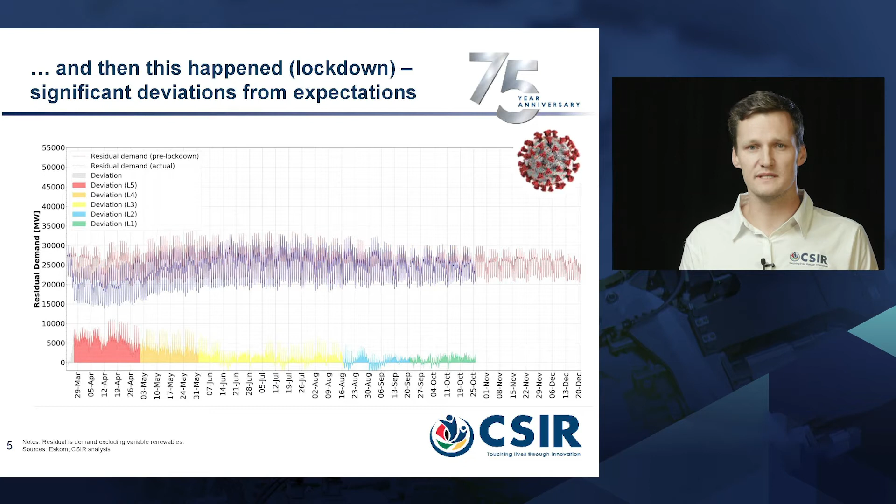As you can see, these significant deviations resulted in some system operations challenges, but it did indeed assist. That lower demand provides additional space for the supply side and for maintenance to be done. And we'll try and talk through that as well in terms of the maintenance that was done during the weeks of 2020 when we were in level 5 and level 4 of the lockdown.

If we just zoom in then specifically on that deviation, up to 11 gigawatts under level 5 at least, and up to 8.5 gigawatts under level 4 was what we started to see in terms of the deviation in the maximum demand. Now remember, the South African power system is about a 32 to 34 gigawatt peaking system, so there is a significant impact on the peak demand during those first 5 weeks, and then during the next weeks under level 4, there's still a significant deviation of up to 8.5 gigawatts or 8,500 megawatts.

Unfortunately for the power system, but fortunately for the economy, the demand did return, businesses reopened, the mines reopened, refineries reopened, and you start to see that in the yellow, the blue, and the green, so under level 3, level 2, and level 1 of the lockdown, that the demand really returned back towards, you could call, a new normal, but the deviations are then much smaller during those periods and within error tolerances that you could expect.

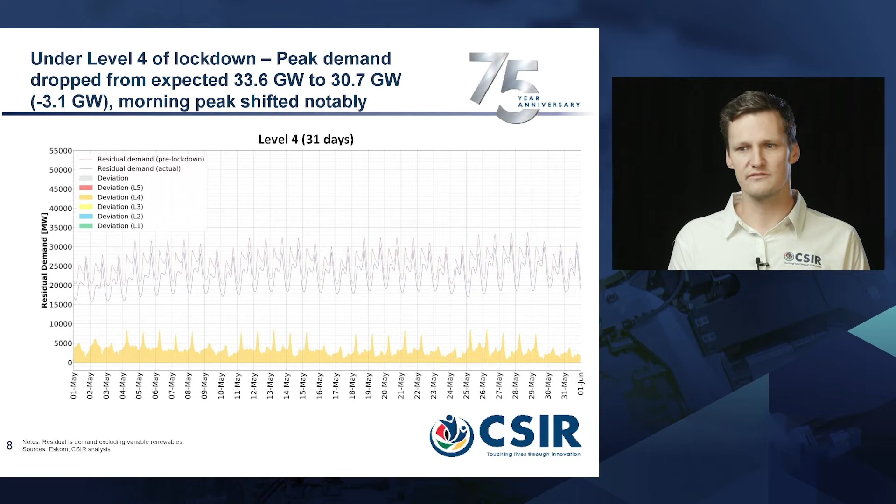Under level 4, a bit more of a pattern started to emerge, where when you look at the deviation at the bottom of this graphic, you see that during the weeks, there's really a large deviation in the mornings. It seems like that was really as a result of people getting up a lot later, not necessarily going into the office, and remote working as a result. So you see those spikes during the weeks, but then on the weekends that starts to move away, and you really just have that sort of base demand difference under level 4.

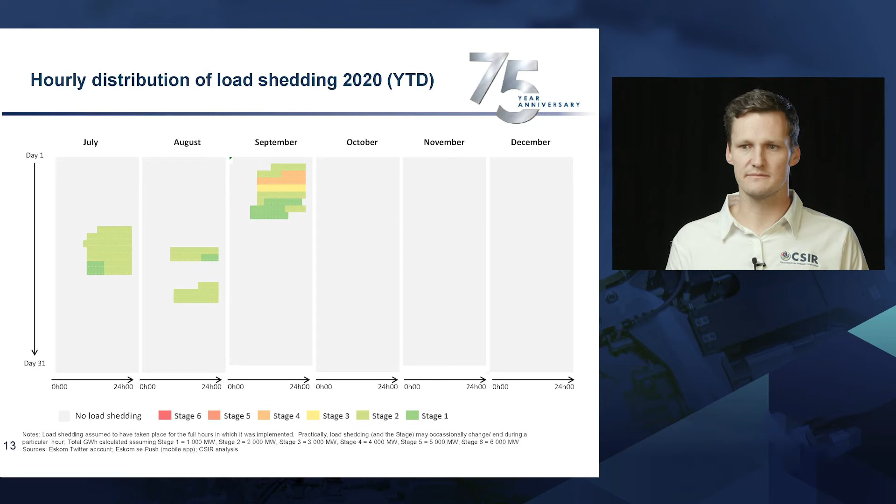So a quick summary, 2020 indeed was the most intensive load shedding year that we have seen thus far, based on the data that we do have in the public domain. 90% of 2019 levels actually occurred within the first 12 weeks. Thereafter, as I was talking now, we did push past 2019 levels in July already, and we're now at 1,734 gigawatt hours versus the 1,352 in 2019.

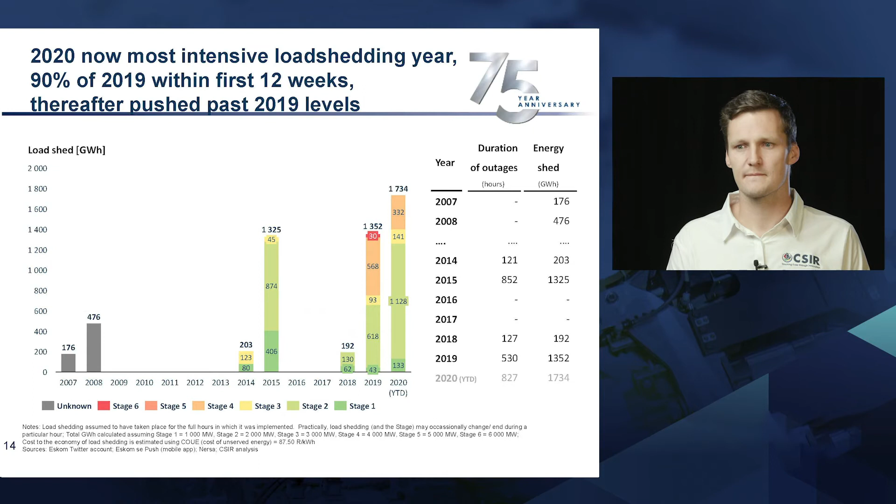So this is a weekly plot of the residual demand for the year. The dark blue is what we have seen on a weekly basis in the order of 3,000 to 4,500 gigawatt hours per week of demand across the country. The gray area, though, is the deviation. So you can see as the lockdown started in week 12, week 13 of the year, you really see significant deviations in the expected weekly energy demand in the order of a reduction of 20% for an extended period of 2 to 3 weeks.

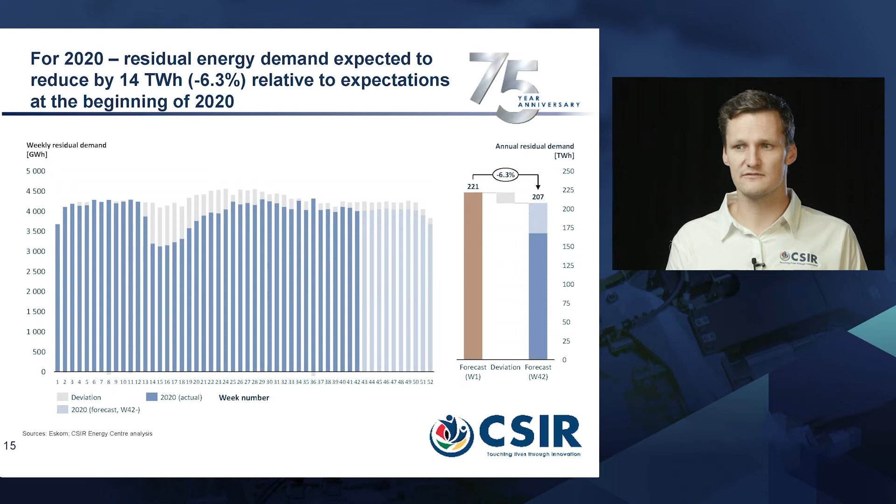That did recover, though, as you see, as we went into winter. A lot of cold days, a lot of high demand, and also, of course, industry returning. And you see that then those deviations get smaller and smaller through the year, all the way up to week 42, of which the data is now available. And you see that the deviations are now quite small, still a bit lower than expectations from the beginning of the year, but really very close to what the forecast was. A 14 terawatt hour, or about 6.3% reduction in energy demand is expected for 2020. That is residual energy demand.

So in terms of what we did at CSIR, system adequacy has been highlighted by many institutions. We're just showing two here, two seminal pieces of work that are periodically published. One is the Integrated Resource Plan 2019, the other of which is the Medium-Term System Adequacy Outlook, also published in 2019. That's also published annually.

But in both of these documents, there was a highlighting of the short-term supply gap between 2019 and 2022 in the IRP, and then also a highlighting of the gap if the Eskom fleet EAF fell below 72%. If you keep that number in mind, you'll start to see why that becomes important, because the EAF is indeed below that level, and hence we have been experiencing load shedding and will be expected to see load shedding in the coming years, unfortunately.

So this is the trend, long-term trend, all the way back to 2000 up to 2019 in terms of actuals, and then some forecasts towards 2030. As you'll see, the decline in the EAF of the Eskom fleet down to below 70%. The year to date is just about 67%. Those are the actuals year to date.

In terms of some forecasts, previous versions of the IRP in the IRP 2018 is the red curve, black curve, and green curve there with the dashed curve. You'll see that the recovery at that stage was expected to head towards 80% in terms of a mid scenario, but still above 70% even in a low scenario.

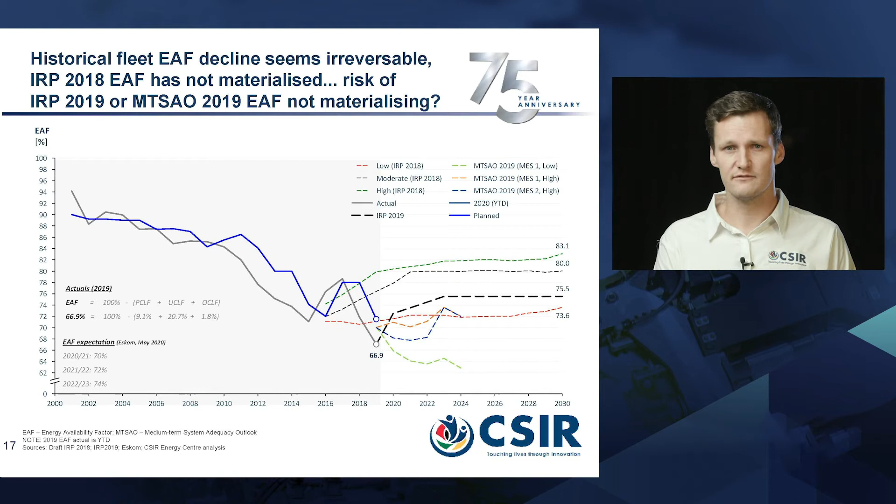And you'll see the medium-term system adequacy outlook, which perhaps has more updated information within it, starts to show something that is closer to the reality, which is the green curve, the blue curve, and that orange curve in terms of a range of the EAF. The green curve is really a low EAF expectation for the medium-term system adequacy outlook, whereas the orange curve is then a high expectation for different levels of minimum emission standards compliance.

So this is now also EAF for the year to date, 66% that I was talking to. In 2019, it was 66.9%. The year before that, just below 72. So you'll see the trend indeed is on a declining trend. It's very worrying. Eskom are trying to improve this, but the reality on the ground is something different.

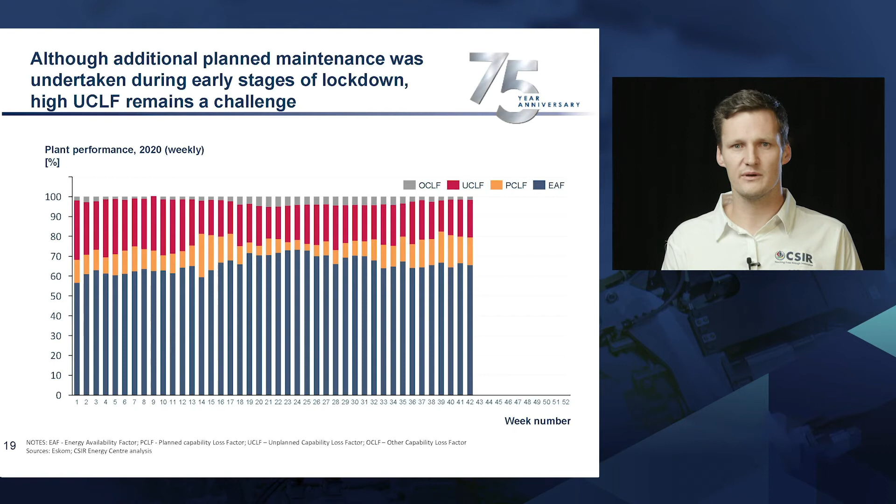The alternative scenario that we looked at, we named the updated scenario, and we developed this around December 2019, so this was before the pandemic. Here we looked at a lower demand forecast, but also a lower EAF, so an EAF that is declining over time.

So coming to the expected shortages. So here we are looking at the IRP scenario. So if you can remember, a relatively high demand forecast, but also a relatively good EAF. So here we can expect capacity shortages over the next few years. The capacity shortages are shown on the left. This refers to the magnitude of an outage in a given hour. And the graph on the right, in terms of energy shortage, refers to the duration and severity of the outage.

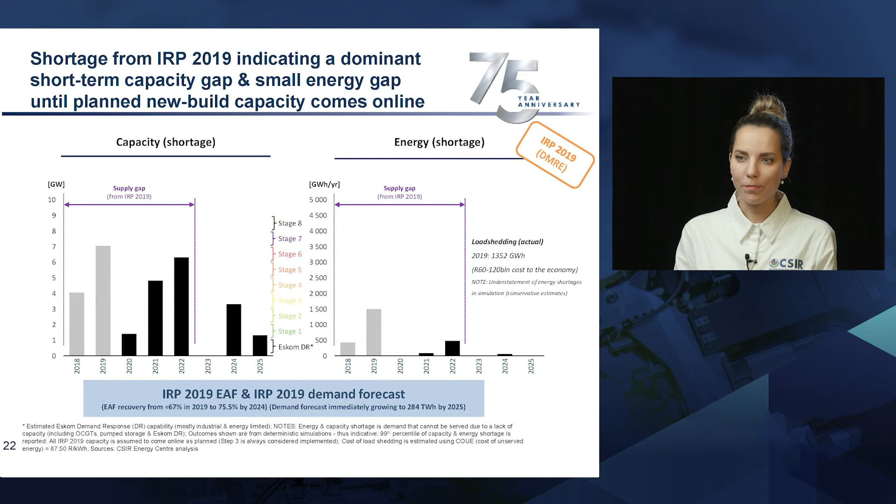If we have a look at what those shortages look like on an hourly basis, this graph shows on the top curves the demand profile of the country, so the national energy demand in summer and winter. The profile is lower in the evening and increases in the morning peak, pretty much flat in the middle of the day, and increases again in the evening.

The graphs at the bottom are showing the profile of the outages that we expect in this IRP scenario. And as you can see in some of the earlier years, the outages are expected to take place all day, so it's sort of a 24/7 profile. And this is indicative of an energy shortage. Over time, this is expected to change to more of a capacity issue, where the outages are in the morning and the evenings.

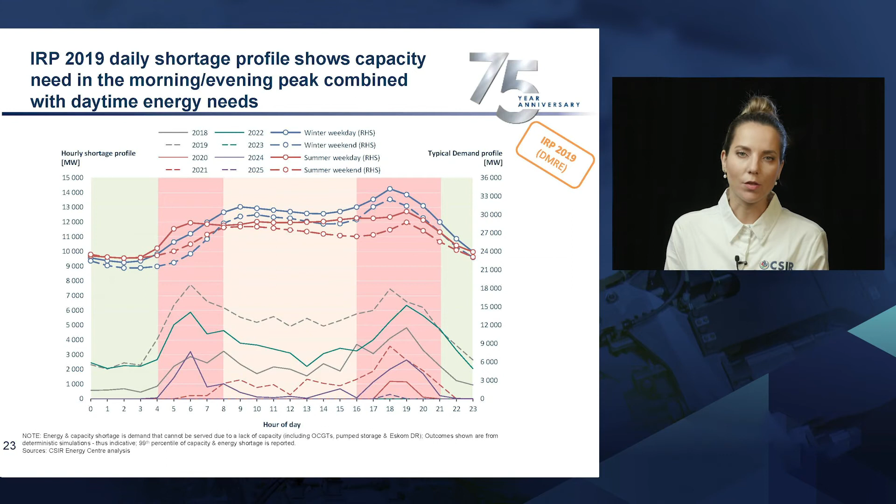So what does this look like in a little bit more detail of the power system supply stack? Here we're showing two simulated weeks for this IRP scenario. We obviously modeled every single hour of all the years, but that's a bit difficult to show. So here we are showing two drastically different EAF weeks. The EAF that we report annually actually does change on a daily basis and a weekly basis, and the average over the year is what we typically report on.

But in a week where we have a poor EAF, 64% in week 1, you can see here we have some unserved energy, so that's the white area, just under the black line, and the diesel generators, which are shown in the cream color, are working really hard to try and meet load. In the second week, this is a much less constrained week where the EAF is performing quite well.

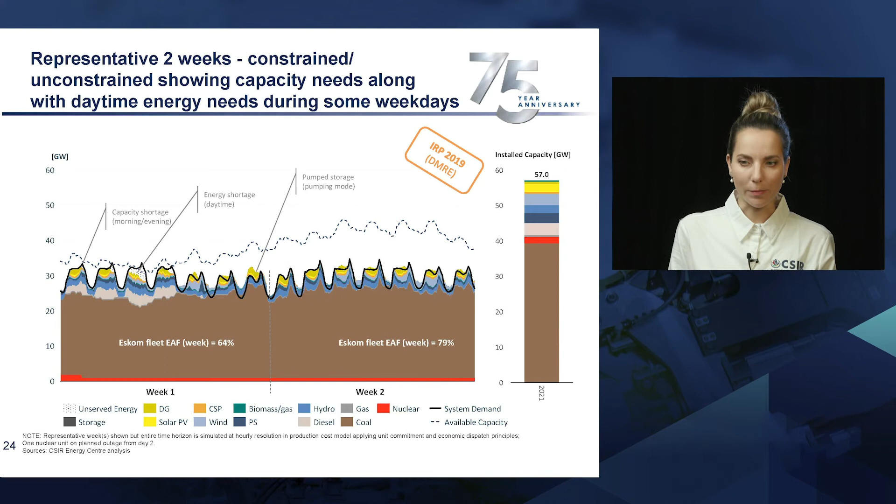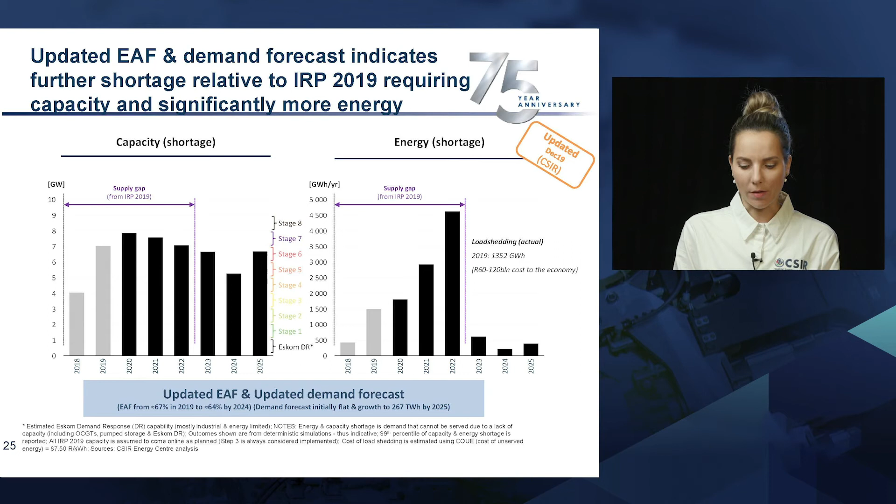Now if we go to the alternative scenario, a little bit lower demand forecast, but a much worse EAF. So here you can see the capacity and the energy shortages are much more profound than the previous scenario. The energy shortages are expected to be worse in 2020 than 2019, and this is expected to grow to 2022, and after that, new capacity comes online according to the IRP. So this is obviously a much worse situation and a worse outlook for the country.

Now, how do those outages look on an hourly basis? Here, the graphs are in the same format as before, but now we can see that the outages are more of an energy shortage occurring all throughout the day in most of the years.

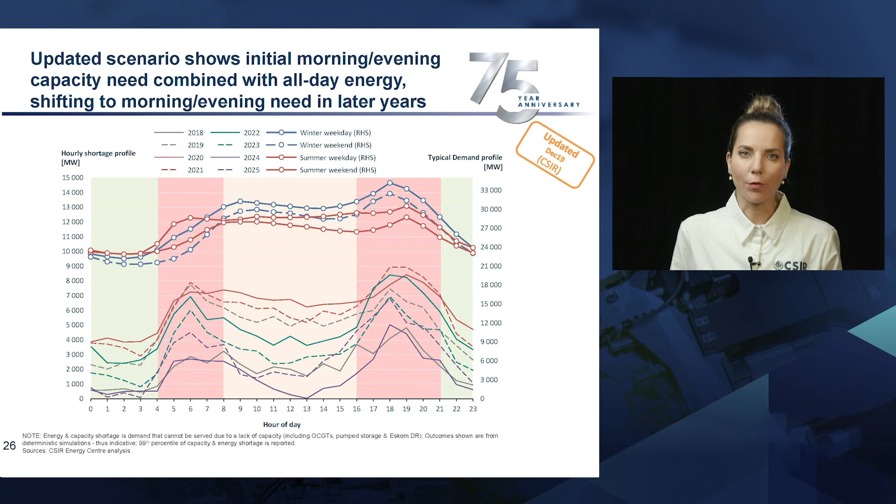Again, we simulate the same 2 weeks. Now we have a much lower EAF. So here we can see a lot more load shedding occurring, so a lot more white shaded areas in this graph, and the diesel generators are working harder in both weeks. The energy shortages are also throughout the day, so you can see the white shaded areas are occurring morning, evening, and middle of the day.

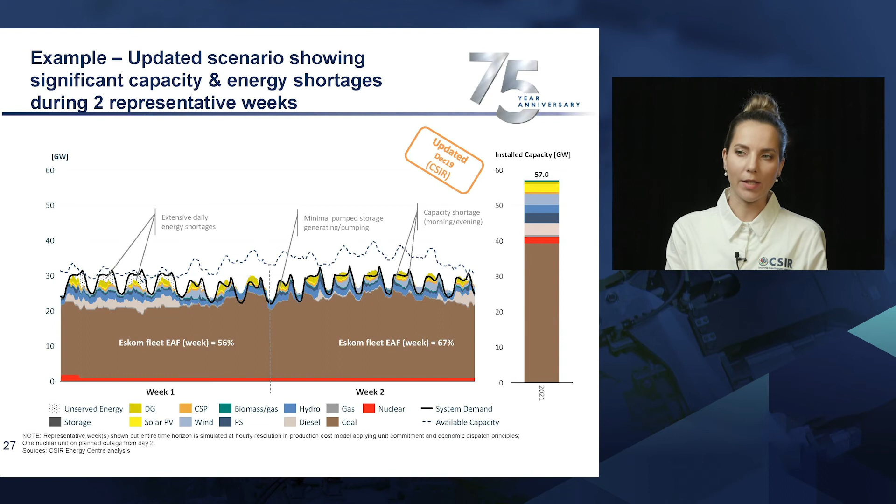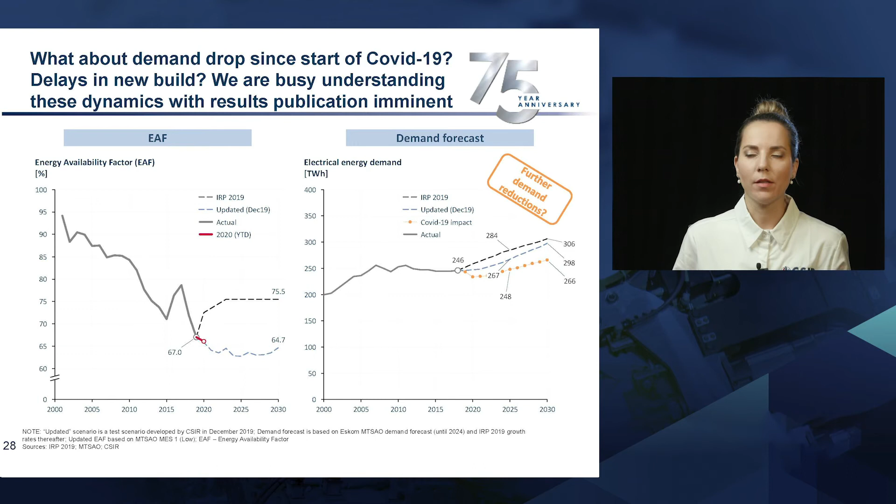So now the question is, what can we do about it? We set a list of criteria of thinking about the options that we have. So obviously if the crisis is here and now, we need to find supply options or demand side options or storage that can be deployed relatively quickly, delivered within 1 to 2 years or even faster. So obviously for that to happen, we can't have extensive procurement processes, so the legislation needs to be quite simple to ensure shorter lead times.

We're looking for options that can meet both capacity and energy shortages. As we've shown, that is an issue in most of the earlier years, as well as the later years. And then contracting of this capacity could be short-term, 1 to 3 years, but there's no reason why it couldn't be longer-term as well if these options are aligned with the long-term vision of the country.

So lastly, something that's not really spoken about often, but of course, none of these options should require any extensive network expansions, because that would delay the process. So we've tried to summarize three steps of what we can do to try and alleviate the power system. These steps work together interchangeably, and if one is delayed or less than expected, the others obviously need to scale up.

So if we just look at the first option, step 1, customer response at scale. So what do we mean by this? We really mean that end users of power begin to supplement their own supply. So this could be any end user, starting from residential customers to commercial customers, industrial customers, all the way to large energy users. And of course, the scale at which this can be deployed across the country is more significant if many of the larger users do that. And to enable this to deploy faster, obviously we do need legislation in place to make this easier for customers.

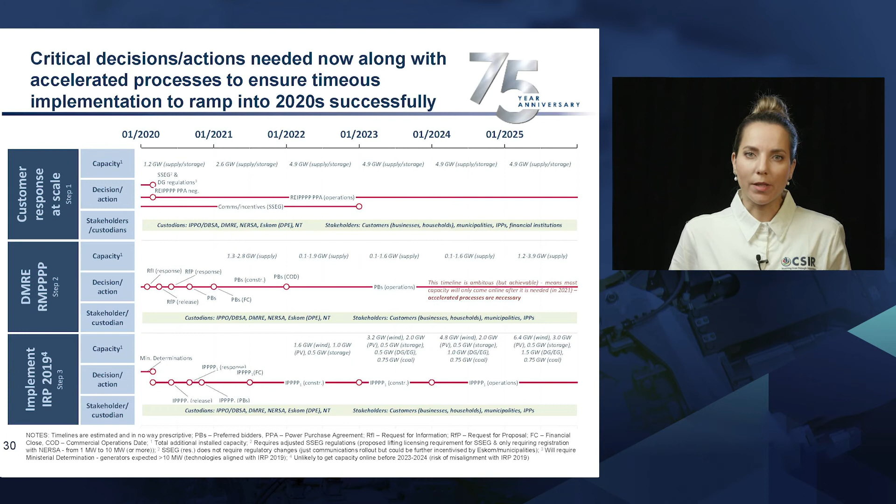So there's currently a request for proposals for 2,000 megawatts, and this is probably only going to come online in 2022, so that would not alleviate the power system this year or next year. Lastly, implementation of policy in the form of the capacity that is assigned in the IRP 2019. This capacity was originally planned to come online in 2022, and we already foresee that this will be a challenge given that we are at the end of 2020 and the process that needs to be followed has not begun yet. So this also needs to be expedited, but will not help us in the immediate 2-year time frame.

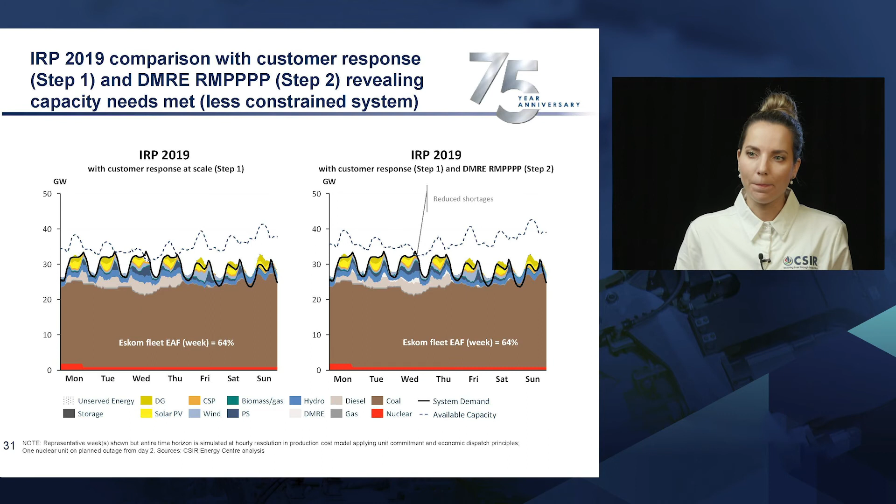So we just wanted to show again what happens if we do actually implement step 1 and step 2 on the previous curves that we showed. Step 3 we assume was always implemented in our modeling results. So as you can see here, the power system becomes less and less constrained as you implement additional steps or additional capacity in the system. The same thing for the updated scenario, where we previously had full days of unserved energy. Now with step 1 we only have unserved energy in the evening peaks, and with step 2 significantly less unserved energy in the system.

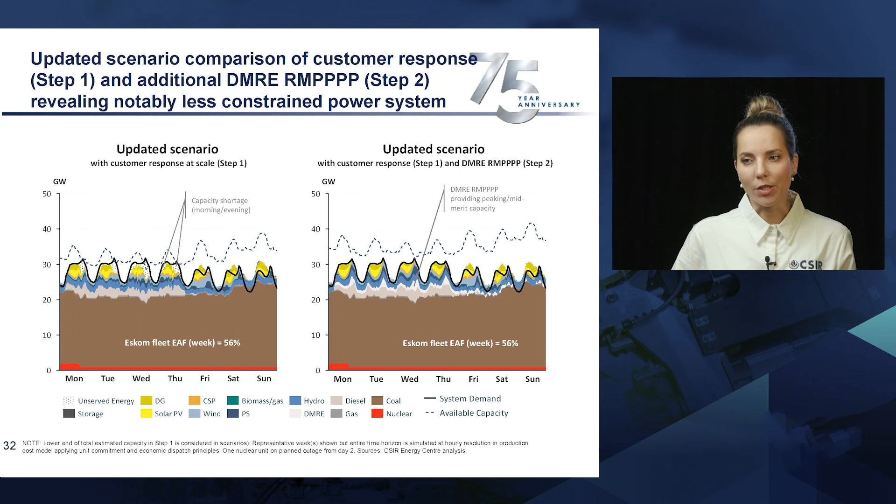So again, just to highlight the actions that need to be taken for the 3 steps and the impact that they are likely to have. For step 1, we need an immediate focus on customer response at scale. And this needs to be enabled through regulations, such as increasing the licensing cap on what you can install on your premises, for example. There could also be incentive programs and awareness campaigns so that people understand what they can do. And this is the only option out of the 3 that would help alleviate the power system right now. So this is the short-term option. It can help us this year already and next year as well.

The other 2 options, like I've said previously, need to be accelerated. So the processes that are in place need to run as quickly as possible so that we can get that capacity online. But that is only expected 2022 and beyond. So just to summarize our analysis, of course, there are 2 implicit assumptions that we haven't highlighted as steps, but these are important and these do need to happen. So the first one is that Eskom does need to ensure that the capacity that needs to come online in the form of Medupi and Kusile and the signing of the existing IPPs, that needs to happen and be delivered on time. And secondly, if there can be any recovery in the EAF in the immediate or short term, this would help alleviate the power system.

This obviously can't come at exorbitant cost if there are alternative options, so that also needs to be analysed and weighed against the advantages. Then of course the 3 steps that we've highlighted, customer response at scale and accelerating the 2 procurement programs. And then lastly, just to highlight again, this analysis is going to be updated soon. The CSIR will publish some updated results given what we think the demand forecast will do post the COVID pandemic, and also what sort of delays we expect on the new build programs.